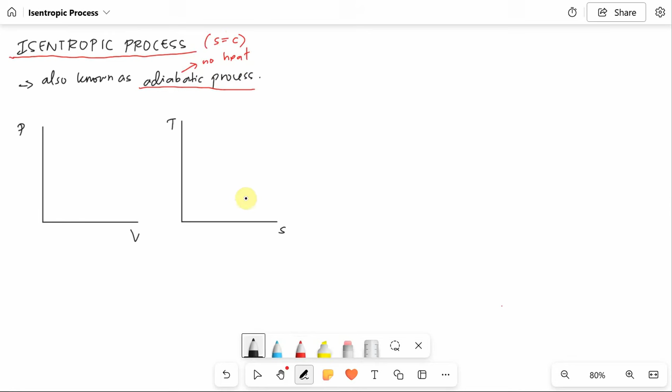Entropy is constant. Una, punta tayo sa TS diagram, nandun yung entropy. Constant entropy process, isang diretso lang. Kasi from point 1 to point 2, for example, pataas, meaning tumaas yung temperature natin, ang entropy natin dito ay same, S1 is equal to S2.

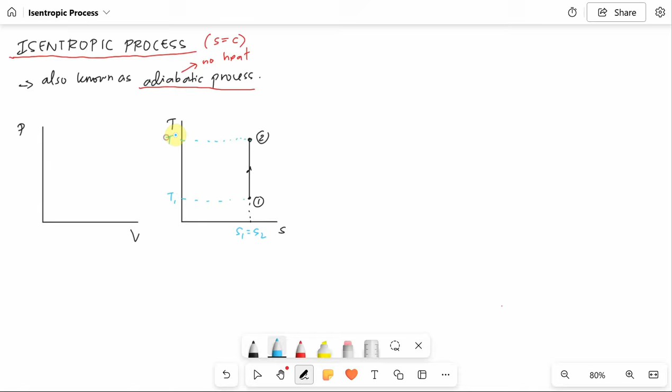At ang temperature 1 natin ay mababa compare sa temperature 2. Vice versa kapag nag-iba yung process, pababa yung arrow natin, yung process natin. So anong equivalent graph niya sa PV diagram?

Actually, pa-curve lang din siya, kagaya ng TS diagram, ng constant entropy, constant temperature process, isothermal. Kung ito yung isothermal, medyo mababa lang onti yung curve ng isentropic process. So ito si constant entropy process. Kung pataas ulit ito, pataas ulit yung process natin, point 1 to point 2.

Ito yung constant temperature process, ito yung constant entropy process, medyo mababa lang yung curve niya onti sa temperature. Pero kapag dinadrawing niyo naman sa PV or TS diagram, no need naman, basta curve lang siya, okay na siya. Representation lang naman siya.

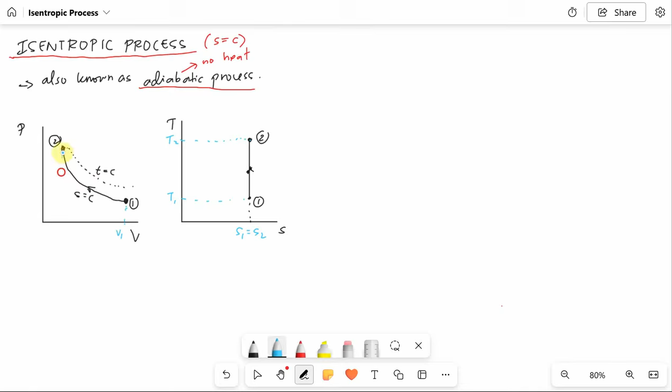Okay, so this is your volume 1, volume 2. Ano nangyari sa volume 2? Nag-compress, meaning lumiit yung volume from volume 1 to volume 2. At yung pressure, kapag kinompress mo yung isang ideal gas, tumataas yung pressure, pressure 1 to pressure 2.

Kung sa TS diagram, isothermal process natin, PV is constant, dito sa isentropic process, PV raised to K is constant. So PV raised to K is constant.

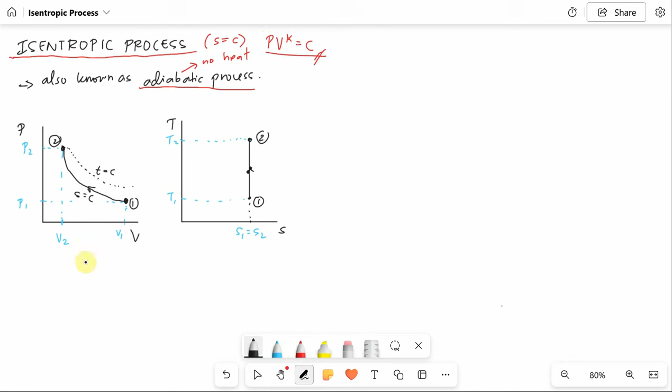Knowing that pressure and volume raised to K is constant, pwede na nating makuha dito yung PVT relationships na meron tayo. Una, PVT relations. Kung constant si PV raised to K, pwede natin sabihin na P1V1 raised to K is equal to P2V2 raised to K. Ayan, yan ang una nating PVT relations.

At then, from that, makukuha pa natin yung iba pang PVT relations. Punta tayo dito. From this one, alam natin, from PV equals MRT. Kunin natin dito si volume. Kung si volume 1, volume is MRT over P.

I-substitute natin volume dito sa PV equals MRT, dito sa PVT relationship niya. Ang V1 natin, mass is constant, R is constant, T1 over P1. Then ang V2 natin is mass times R, T2 over P2. Substitute natin yan dito sa PV raised to K.

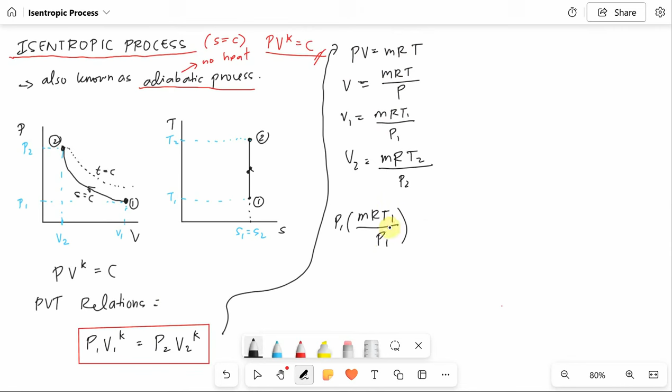So pressure 1 times volume 1, that is MRT1 over P1, raised to K, is equal to P2 times ang V2 natin, MRT2 over P2, raised to K.

Didistribute natin yung exponent. P1, pagsamahin natin yung MR, constant naman yan, raised to K. T1 raised to K all over P1 raised to K, yan yung mangyayari. Then P2 times MR raised to K times T2 raised to K all over P2 raised to K. Kita niyo yung constant, MR raised to K, pareha lang yan, maka-cancel na yan.

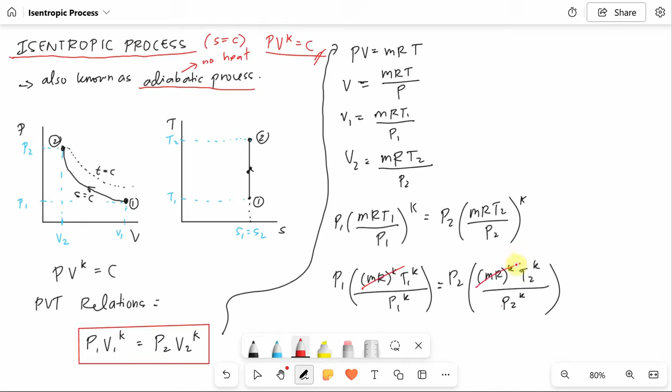So meron tayong pressure and temperature. Simplifying further, pwede nating sabihin na yung P1, T1 raised to K, all over P1 raised to K, is equal to P2, T2 raised to K, all over P2. And then, kapag meron tayong exponent, yung numerator ay 1, tapos may denominator na same base, same variable, so magma-minus sila.

Pwede natin sabihin dito, P1 raised to 1 minus K times T1 raised to K is equal to, sorry, may raised to K pala dito yung P2. So P2, ito ulit, 1 dito exponent sa baba K, 1 minus K times T2 raised to K.

Pagsamahin natin lahat ng pressure and lahat ng temperature. Si P1 pupunta sa ilalim ni P2, si T2 pupunta sa ilalim ni T1 na cross multiplication. So that will be T1 raised to K all over T2 raised to K is equal to P2 raised to 1 minus K.

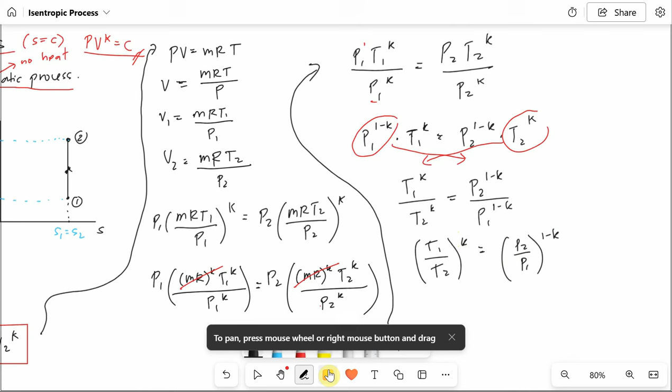All over P1 raised to 1 minus K. Simplify natin to, T1 over T2 raised to K is equal to P2 over P1 raised to 1 minus K. Then, para maalis yung K, pwede natin yan i-K root both sides.

Yan, cancel na si K dito sa temperature. Ang matitira, T1 over T2 is equal to yung K na exponent dito. Pupunta yan dito sa ilalim ng K, kasi yun yung property of radicals natin. Okay, so that is P2 over P1 raised to 1 minus K over K.

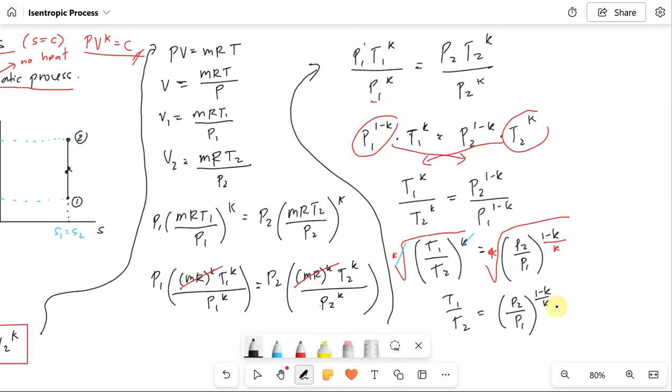Pero mukhang baligtad yung na-derive natin. Pero pwede rin tong formula na to. So try natin yung isang formula na kilala nyo, yung dapat K minus 1 over K. Diba? Pero same with this one, same lang yan.

Punta tayo dito sa formula na to. Instead na ginawa ko ay 1 minus K, ibababa ko tong P1, lagay natin dito sa ilalim. So magiging P1 raised to negative 1. So dito, punta tayo dito. So bali magiging T1 raised to K is equal to P1 raised to negative 1 times P1 raised to K is equal to T2 raised to K.

Yung P2, lagay ko sa ilalim. P2 raised to negative 1 times P2 raised to K. So ito ay magpa-plus. So T1 raised to K all over P1 raised to, ayan na, K plus negative 1, that is K minus 1. And then this one, T2 raised to K all over P2 raised to K minus 1, or negative 1 plus K is K minus 1.

Ayan, medyo okay na, ito yung familiar tayo. So yung P2, lagay ko, cross multiply, yung T1 lagay ko dito. So P2 raised to K minus 1 all over P1 raised to K minus 1 equals T2 raised to K all over T1 raised to K.

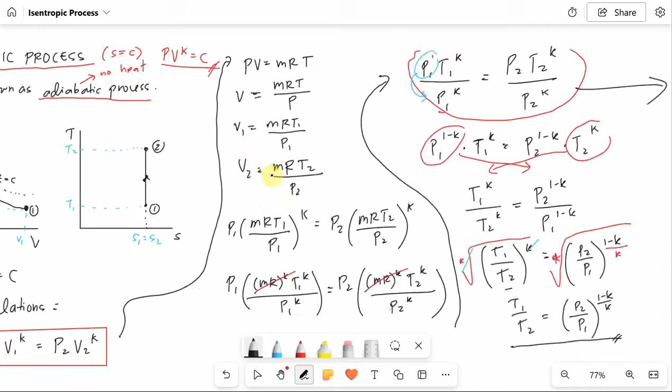And then sunod, yung heat. So heat natin will be equal to 0. Kasi nga, sabi natin, adiabatic process, o there is no heat on the process. No heat added, no heat rejected. So the heat is 0 on isentropic process. Okay, so tandaan natin to.

Ayan, sunod ay work non-flow. So for work non-flow, general formula pa rin natin is integral of PdV from 1 to 2. And ano yung constant natin? P1, PV raised to K is constant. Kunin natin yung P, lagay natin dyan. P is constant over V raised to K. Dito, cross multiply, so substitute natin dito.

Work non-flow is integral of P, that is C over V raised to K dV from 1 to 2. Si constant, ilabas natin. Work non-flow will be constant times integral of dV over V raised to K from 1 to 2. Okay, then simplify pa natin.

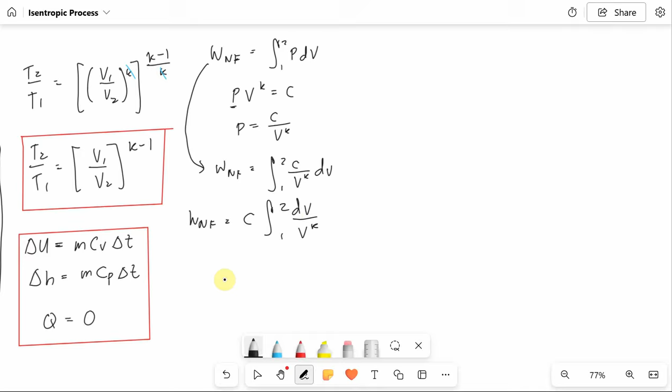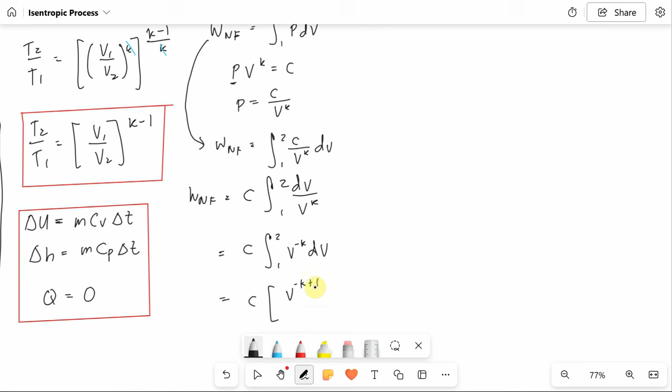Paano integral tong variable na may exponent? So ilagay lang natin sa numerator para maging power rule siya o power integration, diba? So work non-flow is constant integral of volume raised to negative K dV from 1 to 2. Diba? And then ang integral of power, that is plus 1 lang sa exponent, tas kung ano yung total exponent, yun yung denominator natin. Diba? From 1 to 2.

And then substitute natin yung upper limit by minus lower limit. So work non-flow will be constant times V2 raised to negative K plus 1, all over negative K plus 1, minus lower limit V1 raised to negative K plus 1, all over negative K plus 1. And then wala na tayong integral, pwede na natin i-distribute yung constant.

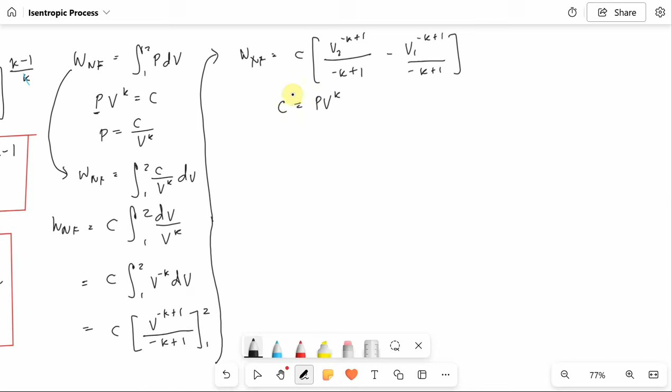Ang constant natin ay PV raised to K. So that is in terms of numbering. So constant is PV raised to K. Kung sa 2, P2V2; kung sa 1, P1V1. Okay? So therefore work non-flow will be, substitute ko doon. Tapos i-distribute ko, yung una tapos yung pangalawa. So P2V2 raised to K, ito pa lang yung constant.

Dinistribute natin, ito yung constant, times V2 raised to negative K plus 1, all over negative K plus 1, minus yung constant ulit dinistribute ko, P1V1 raised to K, so P1V1 raised to K times V1 raised to negative K plus 1, all over negative K plus 1.

Ayan, so dito may positive K, negative K, diba? Kung tatanggal yan, matitira na lang 1. So ang mangyayari ay P2V2 raised to 1, all over negative K plus 1, minus P1V1 times V1 raised to K, negative K plus 1, ito positive K, magka-cancel ito, magiging 1 na lang din. So P1V1 all over negative K plus 1. And then same denominator, so arrange lang natin yung denominator. So work non-flow is P2V2 minus P1V1 all over, unahin natin yung positive, 1 minus K. Ayan, so yan ang formula ng work non-flow ng isentropic process.

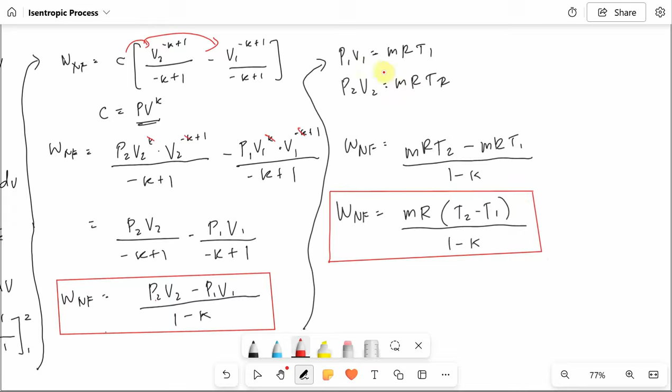So pwede nyo laruin yung mga formula using PVMRT. Okay, so ano pa ba nakalimutan natin? Meron na tayong PVT relations, change in entropy, internal energy pala to, enthalpy, and heat. Yon, change in entropy, sakto pala. Yung wala pa tayo, so change in entropy, that is S2 minus S1. Dahil constant si S, meaning S1 is equal to S2, constant si entropy, so change in entropy is also 0. So maraming 0, diba, sa isentropic process. So take note on that.

Okay? Ayan, so solve tayo ng example. Bago pala din tayo mag-example, work non-flow pa lang to, diba. Tingnan natin yung formula ng work steady flow.

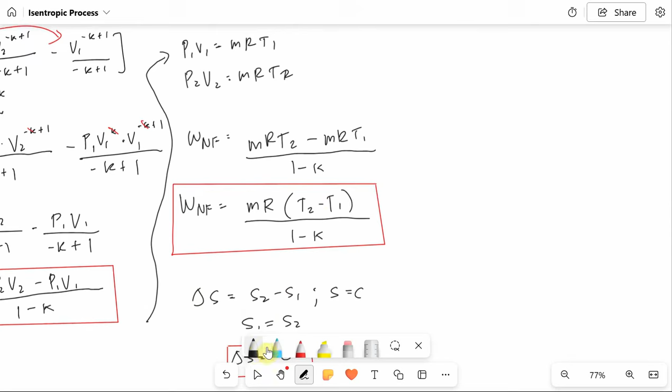So yung work steady flow galing sa energy balance, diba, energy in, energy out. So work steady flow, kung naalala nyo, meron yung energy in, energy out. First law of thermodynamics, na-discuss ko na to. So all energy entering is equal to all energy leaving on the system. So yung mga energy entering the system ay meron tayong potential energy 1, kinetic energy 1, internal energy 1, flow work 1. Equals, so kung lahat lumalabas, for example, potential energy 2, kinetic energy 2, internal energy 2, plus flow work 2, tapos meron tayong heat and work steady flow, diba, sa energy balance.

So balikan nyo na lang yung discussion natin dito. So yung heat, pwede naman kahit saan kasi heat is 0, diba. Sabihin natin dito, plus heat plus work steady flow. Okay? So substitute lang lahat, o transpose pala, diba, lahat. So alam niyo na yan. So 0 na lang natira dito sa kabila.

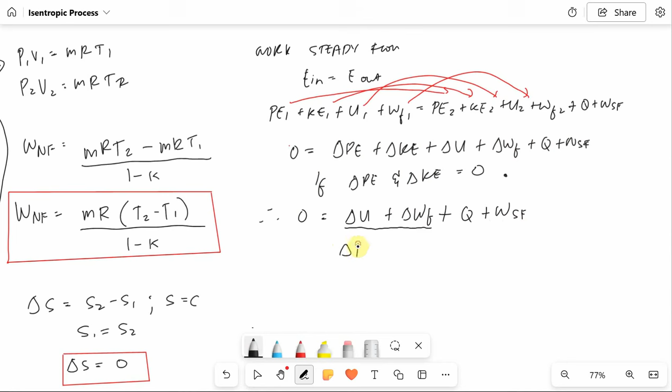0 is equal to change in potential energy plus change in kinetic energy plus change in internal energy plus change in flow work plus heat plus work steady flow. If change in potential energy and change in kinetic energy is equal to 0, what remains is change in internal energy plus change in flow work, plus heat plus work steady flow. And internal energy plus flow work, that is change in enthalpy, change in internal energy plus change in flow work.

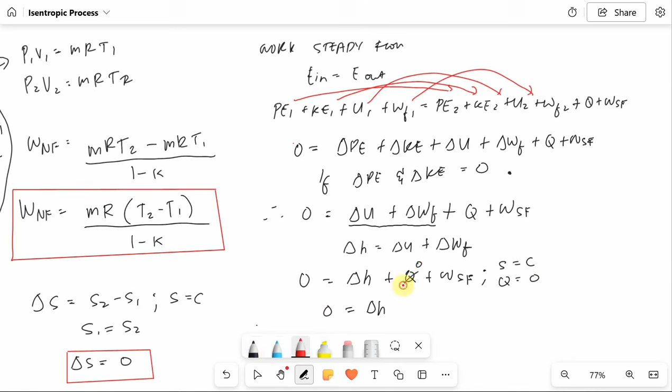So 0 is equal to change in enthalpy plus heat plus work steady flow. Since this is an isentropic process, a constant entropy process, heat is 0. So 0 is equal to change in enthalpy, since heat is 0, plus work steady flow.

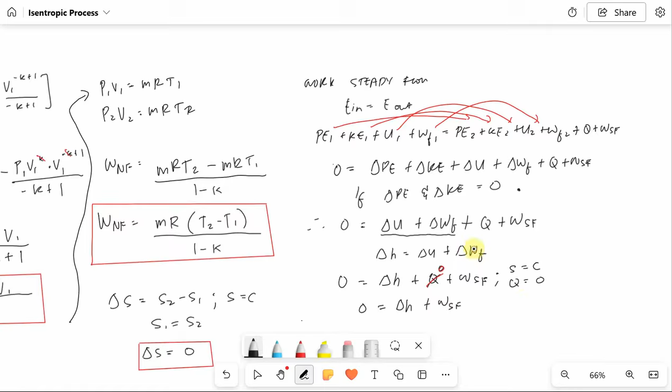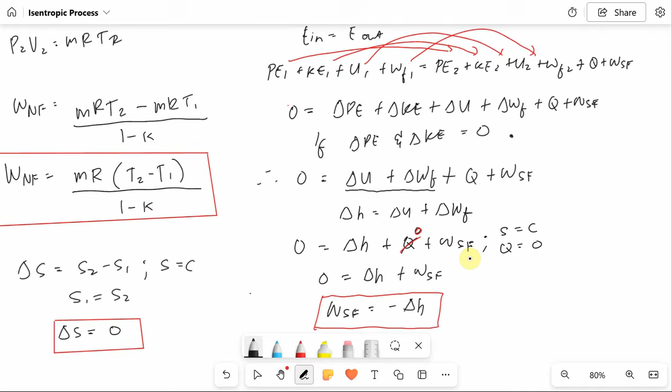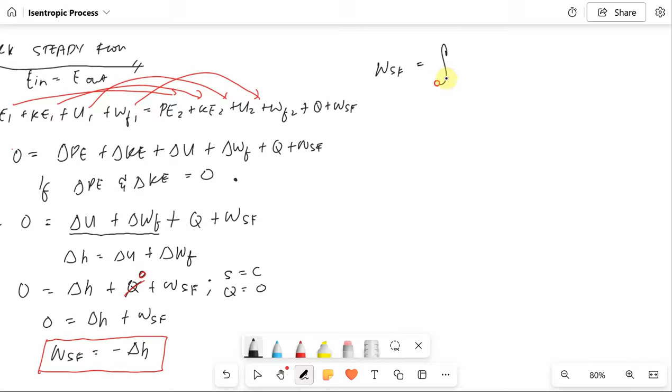Therefore the formula, work steady flow is negative change in enthalpy, or negative MCP delta T. So that's the formula of work steady flow from energy balance. But from the PV diagram, the formula of work steady flow is the integral of, if non-flow is PdV, work steady flow is integral of VdP.

From that, 1 to 2, the constant is still the same, we won't derive it here, so try to derive it yourselves.

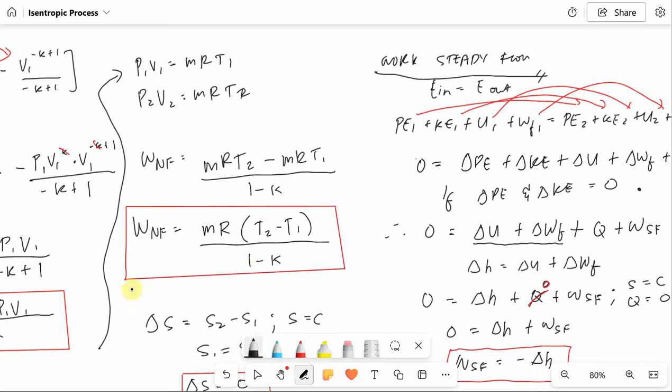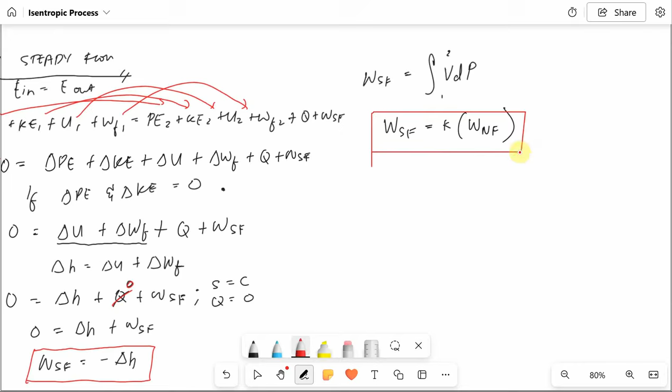So work steady flow is also equal to K times work non-flow. Simple like that. Work non-flow is mR delta T over 1 minus K, or P2V2 minus P1V1 all over 1 minus K. That's the shortcut formula for work steady flow when dealing with an isentropic process. So let's solve a problem.

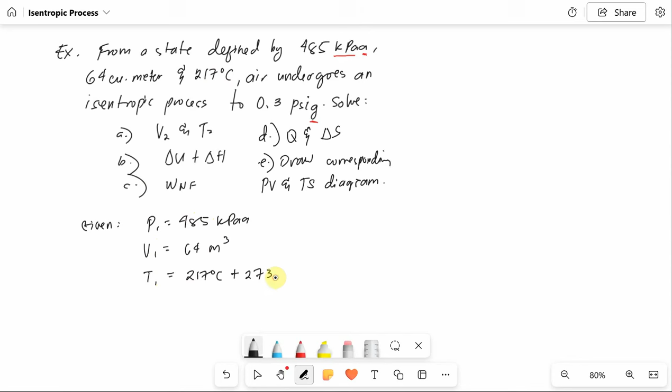So what's given? We have pressure 1, 485 kilopascal absolute. Volume 1, 64 cubic meter. And temperature 1 — again, when we have this, we're in PV=mRT, in the processes, the 217 degrees Celsius, we convert to Kelvin right away.

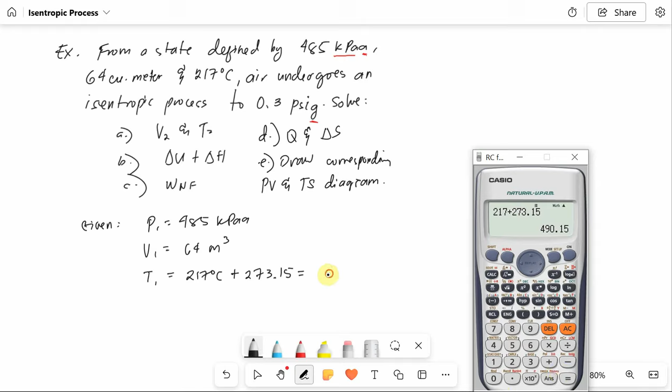Using 273.15 — depending on your instructor, whether you use .15 or just 273. So 217 plus 273.15, that equals 490.15 Kelvin, our absolute temperature.

And then we still have another given, pressure 2. So pressure 2 is 0.3 PSI gauge. We can convert that to absolute by adding atmospheric pressure in PSI, that's 14.7 PSI. So when we add that, it equals 15 PSI absolute.

Then we convert to kilopascal. PSI at the bottom, that's 14.7 equals 1 atmospheric, and in kilopascal, 1 atmospheric is 101.325 kilopascal. I already discussed how to convert pressure, so go back and review that.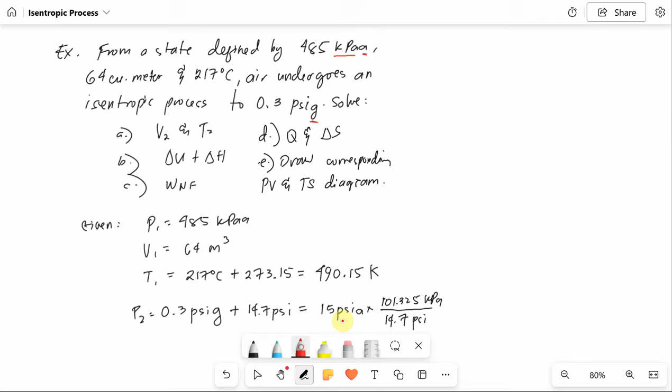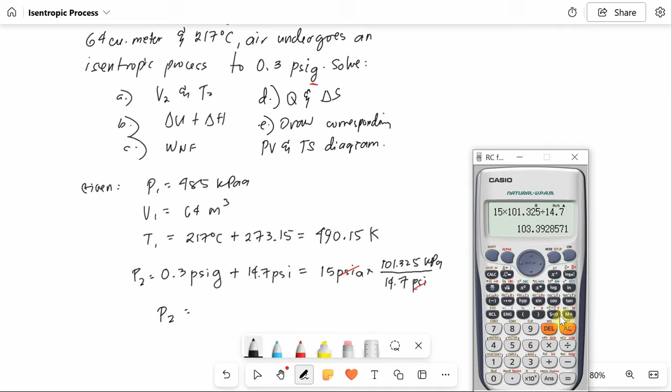So that's absolute now. Our P2 will be calculated — 15 times 101.325 divided by 14.7, that equals 103.3929 kilopascal absolute. Again, it depends on your faculty how many decimal places they use.

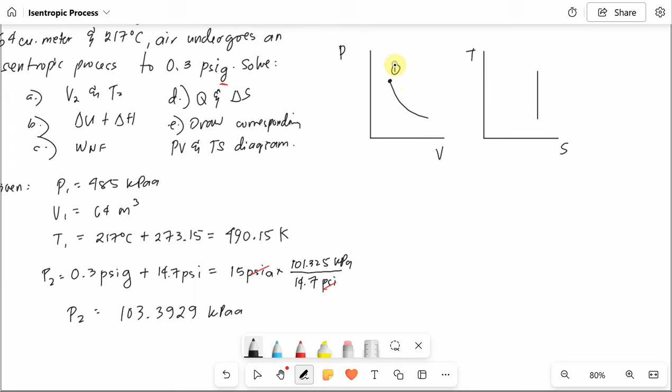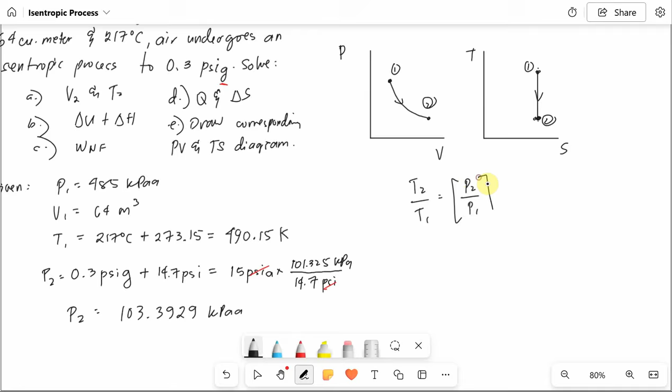So, bumaba din yung temperature natin from point 1 to point 2. So, solve natin si V2 and T2. Meron tayong T1, P2, and P1. Meron tayong relationship: yung T2 over T1 is equal to P2 over P1 raised to K minus 1 over K. At pwede na natin i-solve si T2.

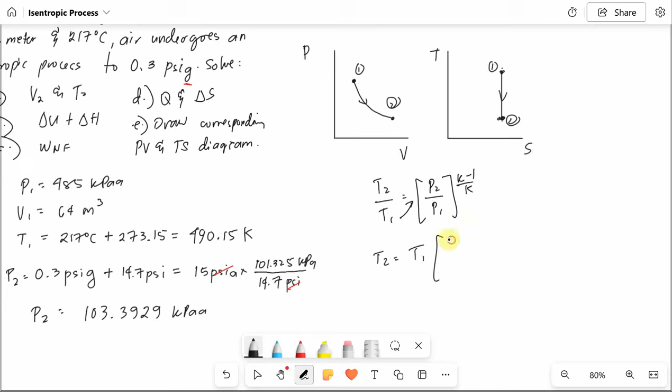T2, cross-multiply mo lang to. T2 will be equal to T1 times P2 over P1 raised to K minus 1 over K. Air ulit ito. So ang K ay 1.4. Given naman na lahat, substitute na natin.

Dapat naka-Kelvin dito. T1 is 490.15 Kelvin. P2 ay 103.3929 all over P1, 485. Pareha naman silang kilopascal, so cancel, raised to 1.4 minus 1 all over 1.4.

Solve natin: 490.15 times, may kailangan tayong parentheses, 103.3929. Double check yung ini-input nyo lagi sa calculator. All over 485 raised to fraction: 0.4 na lang, 1.4 minus 1 is 0.4 divided by 1.4.

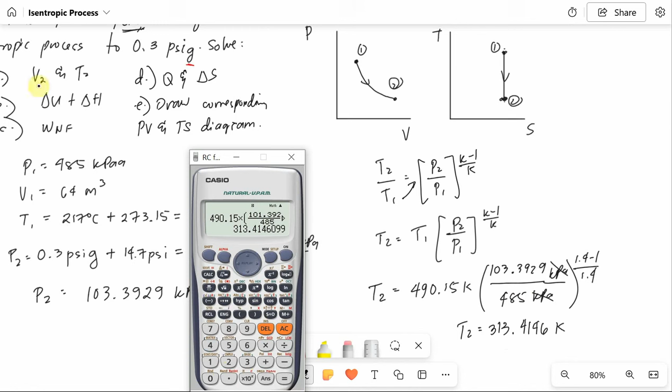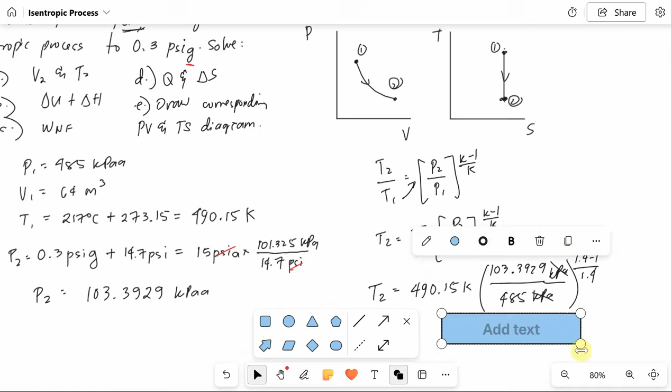313.4146 Kelvin. Yan ang pinapahanap na T2, i-box natin. Shape dito, ito na. 313.4146, yan pala may box.

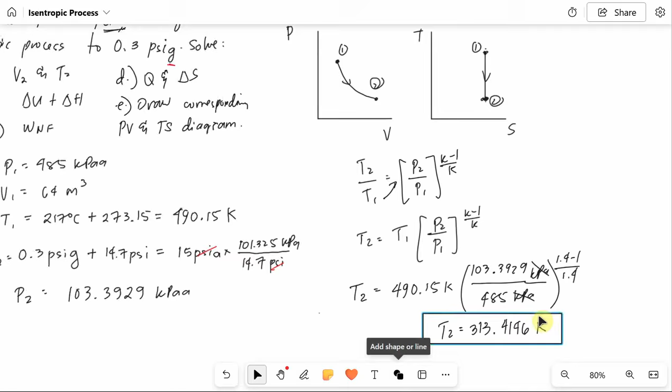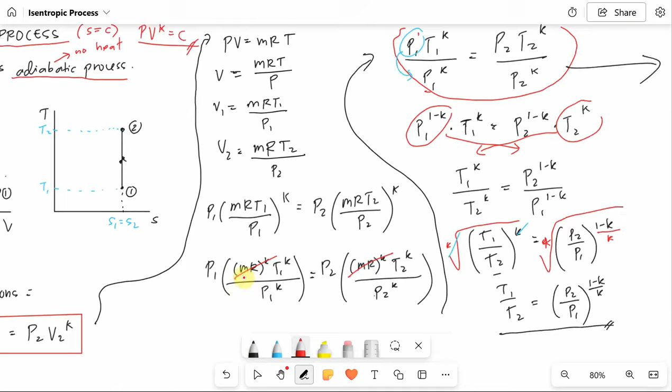And then V2. Dahil may T2 na tayo at may V1, pwede tayong mamili ng paano i-solve si V2. Pwede natin i-solve ito, o pinakamadali, yung unang relationship: P1 V1 raised to K. Ang given naman kasi is pressure, initial at final, tsaka may initial volume, so pwede natin masolve agad si V2.

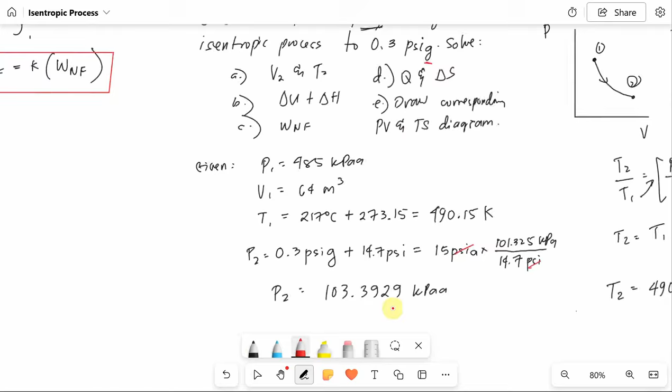Using P1 V1 raised to K is equal to P2 V2 raised to K. Dito, V2 hinahanap natin. So divide both sides natin by P2 o cross multiply natin si P2 para si V2 na lang nandito sa kabila. Tapos imi-mirror ko lang. V2 raised to K is equal to P1 V1 raised to K all over P2. At para makuha si K, si V, root both sides.

Dapat alam pa rin natin itong algebra. So V2 is K root of P1 V1 raised to K all over P2. V2 will be 1.4 root of P1. P1 ito, 485 kilopascal, times V1. V1 is 64 meter cube raised to 1.4.

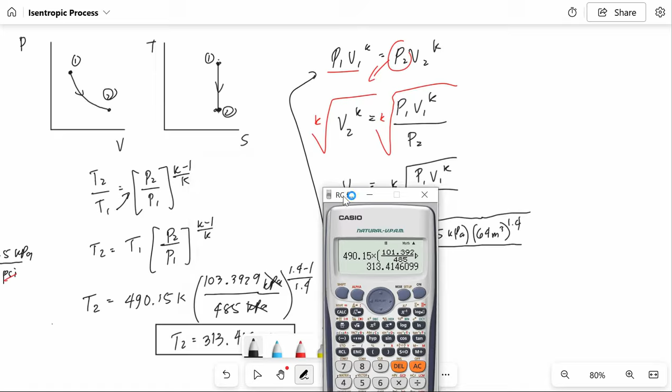All over P2. P2 is 103... 103 po, but 101 kanina yung sinolve ko. Double check, ayun nga, may mali pala tayo, sorry. 103 pala. Dito sa T2, kala ko 101. Yan, 103.3929. 315 pala, 0.1686. Yan, 315.1686 Kelvin.

Huwag kayong maduling kapag mag-type kayo sa calc nyo. Ang P2 natin is 103.3929 kilopascal. So cancel na yung kilopascal, meter cube na yung lalabas dyan, kasi 1.4 naman.

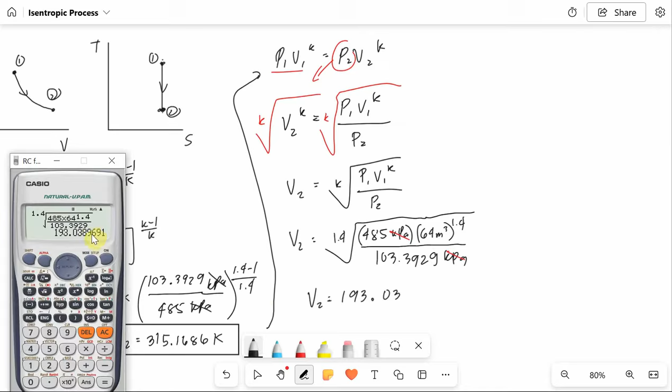Okay, saan yung ito? Pwede na to. 1.4 root of 485 times 64 raised to 1.4 all over 103.3929. Ayan, so V2 is 193.0389... 0.3896, magsisiro nito, magiging 193.0390 meter cube. Okay, box natin.

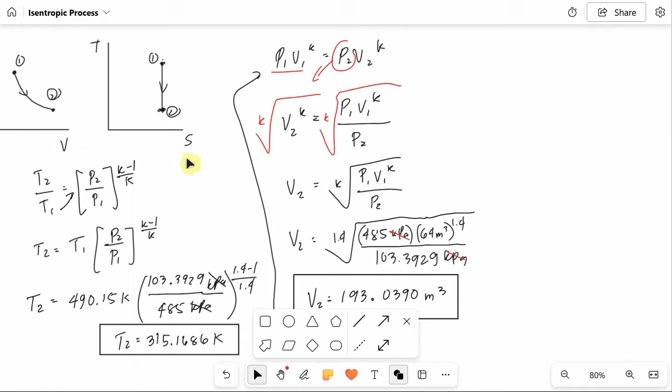Okay, so meron na tayong V2, T2. Ano nangyari? Dapat bababa yung temperature 2, so from 490 naging 315. So tama yung graph natin, pababa. Yung volume natin ay tumaas, from V1 na 64 naging 193. So tama yung graph natin.

And then sunod, anong hinahanap? Change in internal energy and change in enthalpy. So change in internal energy, same lang ang approach. Change in internal energy is mCV delta T.

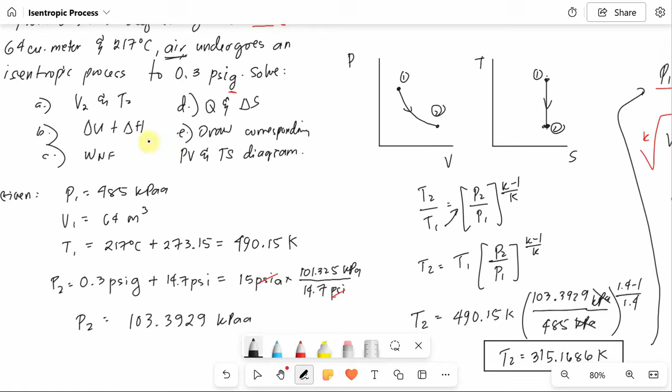Pwedeng Celsius, pwedeng Kelvin. Dahil Kelvin yung given natin, tsaka hindi naman naglagay ng required na unit ng temperature. Pero kapag may require na temperature 2 in degree Celsius, kailangan i-convert pa natin sa degree Celsius. Dahil walang require, so Kelvin na lang tayo. Change in internal energy, may mass, mCV delta T.

So meron ba tayong mass? Wala tayong mass, pero meron tayong P1, V1, T1, tsaka air. So pwede natin gamitin si PV equals mRT. P1 V1 T1, mass and ideal gas constant is constant, so mass will be P1 V1 over RT1.

Cross multiply lang. Mass will be P1 is equal to 485 kilopascal, kilopascal is kilonewton per meter squared. V1 is 64 meter cube. R ng air is 0.287 kilojoule per kilogram Kelvin, at temperature 1 is 490.15 Kelvin.

Dapat dito sa unit analysis natin, kung mass yung hinahanap, dapat mass na lang din matitira sa units natin. Kilojoule, ang kilojoule ay kilonewton meter. Si Kelvin, cancel. Si kilonewton, cancel, meter squared cancel dito. May isa pang tira, isa ditong kilonewton meter, maka-cancel din lahat yan. So matitira natin kilogram, nasa ilalim siya ng denominator.

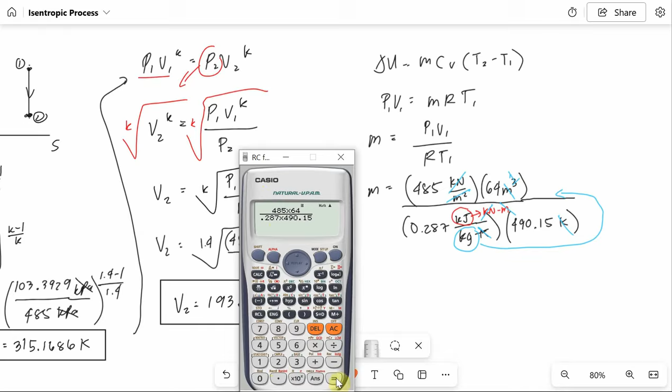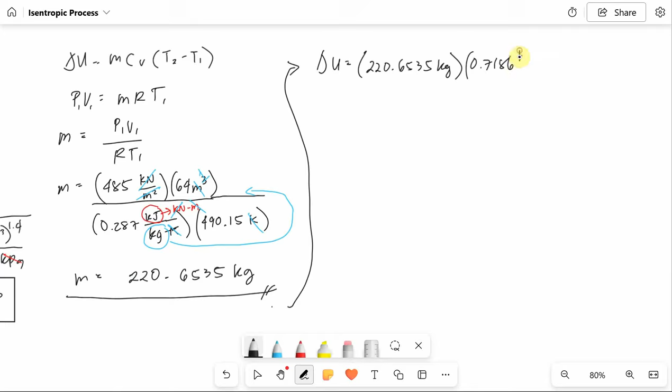220.6535 kilograms. So, yung mass natin, masasolve na natin si change in internal energy and enthalpy. So wag natin i-box yung mass, hindi naman hinanap yung mass. Change in internal energy, mass is 220.6535 kilogram, and yung CV is 0.7186 kilojoule per kilogram Kelvin. So ito yung ginagamit ko. Kung may ibang pinagamit sa inyo, sundin nyo yung faculty nyo. Pero mostly, ito naman yung ginagamit.

T2 minus T1. Ang T2 natin ay 315.1686 minus T1 na 490.15, so pareha silang Kelvin. Okay, cancel si Kelvin, cancel si kilogram, ang unit natin ay kilojoules. So ang internal energy natin ay equal sa

220.6535 times 0.7186 times 315.1686 minus 490.15 equals

So negative kasi bumaba yung temperature, no? So paalis din, mas malaki yung umalis na internal energy sa system. So change in internal energy is equal to negative 27745.3316, 3317 kilojoules. Ano ba yan? 3317 kilojoules. So yung negative dyan, ibig sabihin, internal energy 2 is greater than internal energy 1 kasi U2 minus U1. Okay, box natin.

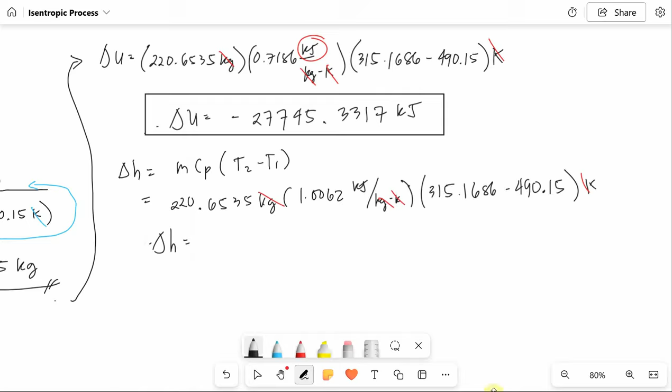The next, C, enthalpy. Okay, nakabox na ang change in internal energy. Punta tayo sa change in enthalpy na mCp delta T, T2 minus T1. So mass is given 220.6535 kilogram. Nasolve na natin pala. Cp, 1.0062 kilojoule per kilogram Kelvin times 315.1686 minus 490.15 Kelvin. So same unit analysis, no? Kilojoule din ang unit ng change in enthalpy natin, which is, ang babaguhin lang natin dito is yung Cp.

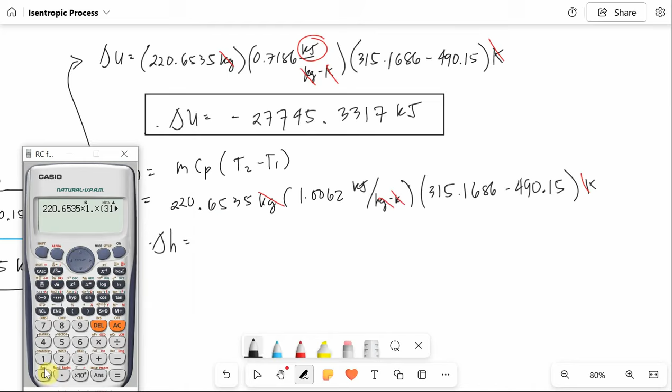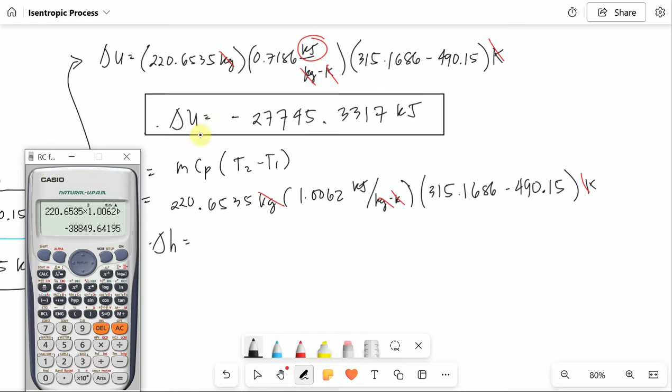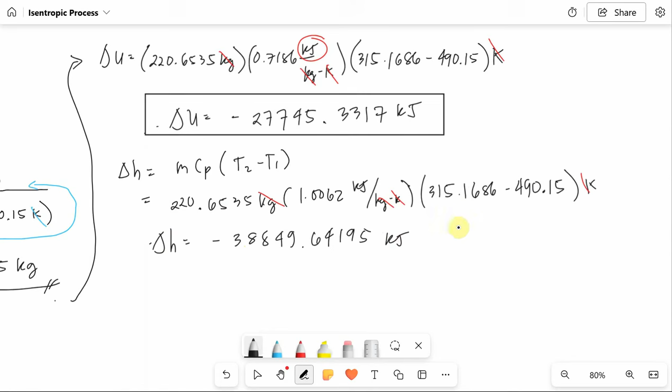1.0062. Ayan, so negative din. Meaning mas malaki si enthalpy 1 kaysa enthalpy 2. Sorry, mali pala yung sinabi ko sa internal energy. So negative 38849.6419. O kung ayaw nyo mag-round up, kunin nyo na lang lahat, 195. Okay, kilojoules. So again, mas malaki si H2 kasi ang delta H ay H2 minus H1. H1 pala, sorry, kasi mas malaki sa H1 kaysa kay H2, kaya naging negative yung sagot natin. Okay, ayan, same with internal energy.

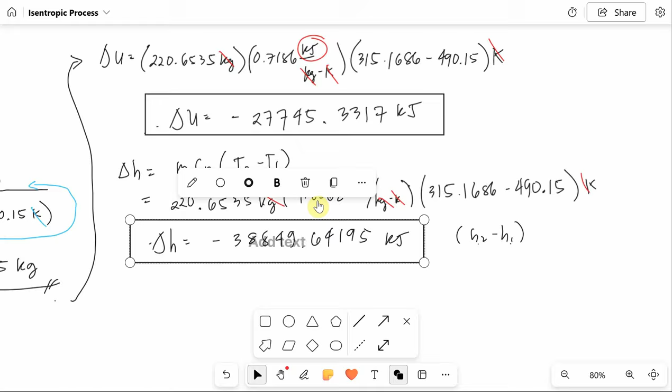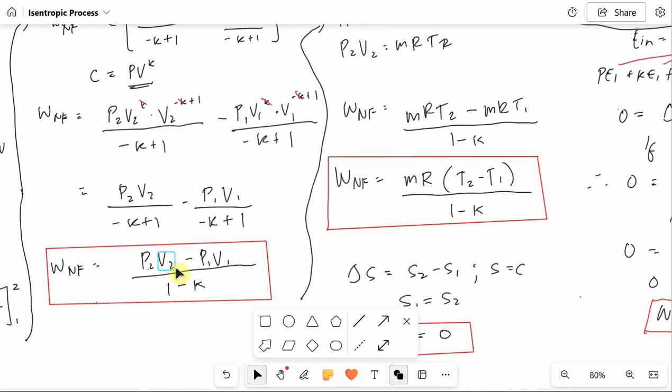Sunod, meron pa bang hinahanap? Work non-flow. Ano ba yung mga formula ng work non-flow natin? Pwede ito, P2V2 minus P1V1 over 1 minus K, or MR T2 minus T1 over 1 minus K. So tingin ko ito na lang mas maganda, P2V2 kasi given si pressure, dalawang pressure given. Si V1 given. So si V2, onti lang yung dinaanan niya para masolve si V2. So onting error itong magiging mangyayari kapag ito yung ginamit natin. Compare dito, yung T2 sinolve, yung mass sinolve. Kung nagkamali ka sa mass, mali ka na sa work non-flow. Dito walang mass, dito lang.

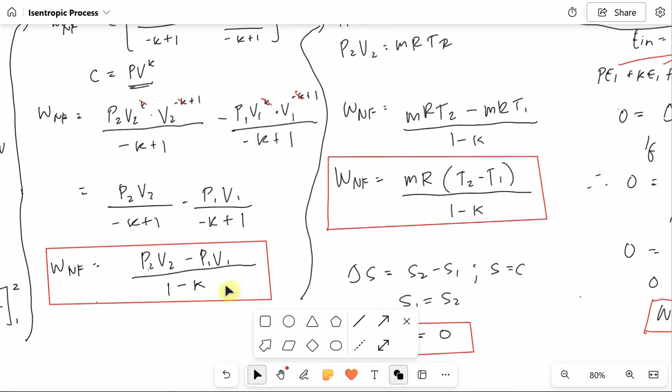So pwede na to, P2V2 minus P1V1 all over 1 minus K. Pero kahit ano dyan, pwede nyo gamitin yung formula ni work non-flow. Nag-isip lang tayo ng mas madali at mas less ang error pag gagamitin yung formula. So work non-flow is equal to P2V2 minus P1V1 all over 1 minus K.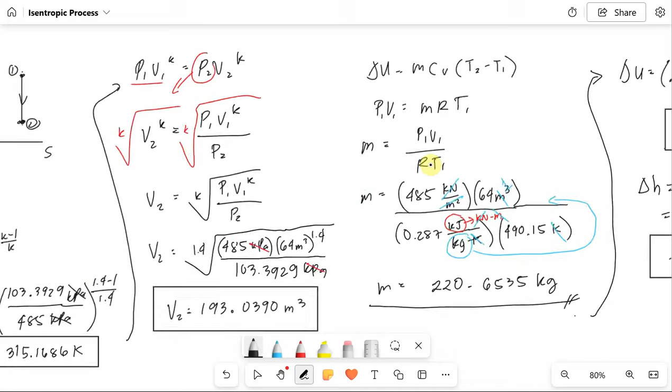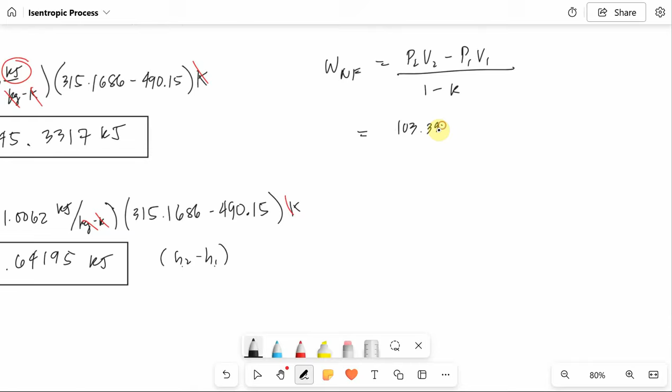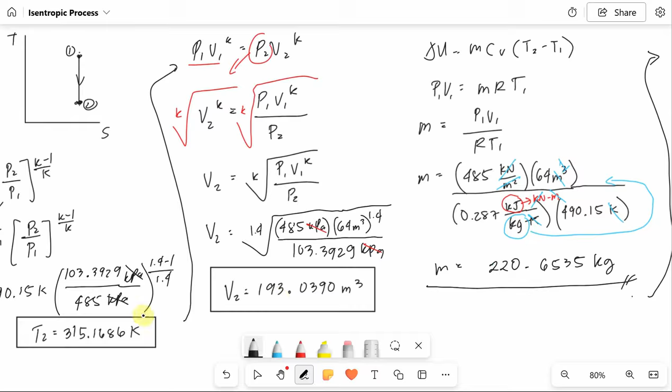P2, given ba yung P2? Given, diba? Ayan, 103.3929 kilopascal. Volume 2, 193.0390. Double check, 193.0390, 103.3929. Yan, it is meter cube

minus P1. P1 is given, so P1 485 kilopascal. And V1 is also given na 64 meter cube, and then 1 minus 1.4, dahil air naman. Okay, so work non-flow will be equal to, so check muna natin yung unit. Kilopascal ay kilonewton per meter squared, area lang, no? So cancel si meter squared, may matitirang isa. And kilonewton meter ay kilojoules. So same with this, kilojoules. So kilojoules ang unit natin.

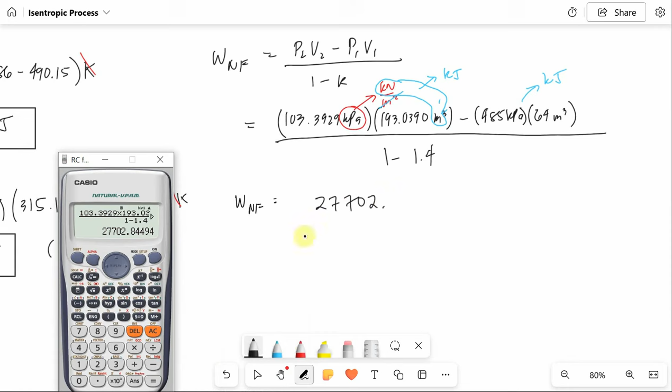Work non-flow ay equal sa 103.3929 times 193.0390 minus 485 times 64 all over 1 minus 1.4. Okay, that is 27,702.8449. Gusto nyo isama yung 4, wala namang problema. That is kilojoules, work non-flow. Okay, ayan.

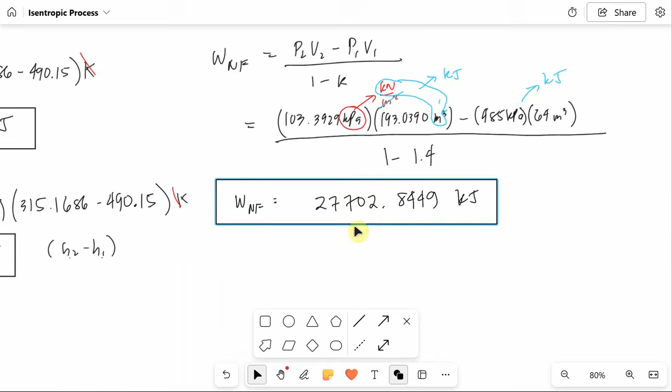Kung gusto nyo, i-try nyo yung MRT2 minus T1 over 1 minus K, kung same lang yung sagot or may onting difference. Sige, pwede nyo naman i-try and pwede nyo i-comment dito.

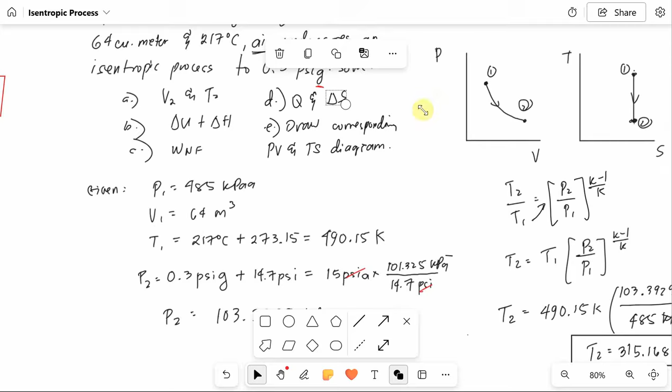So next, ang hinahanap pa, Q, heat, and change in entropy. So dahil isentropic process tayo, kung alam nyo yun, bonus na yun. Heat is 0 and change in entropy is 0 in isentropic process, di ba? So bonus na yan pag pinahanap pa sa inyo yan. Yan, yung heat and change in entropy, 0 dapat. So dapat alam niyo yung concept.

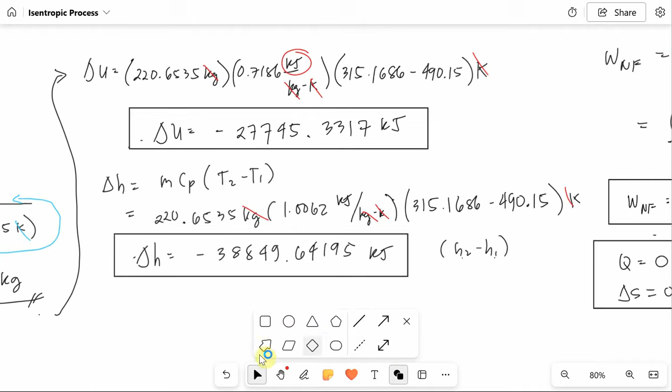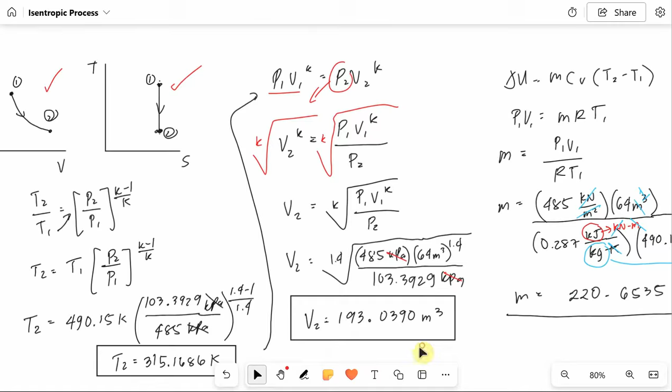And then, sunod, draw TS. Ito na, na-drawing na natin. Okay, so tapos ang isentropic process. So susunod ko na lang yung polytropic process, abang-abang na lang. Practice lang, hanap ng book, hanap ng mga problem, solve lang ng solve para mas magamay yung mga processes and other concepts natin sa ME. Okay, so thank you and good luck.